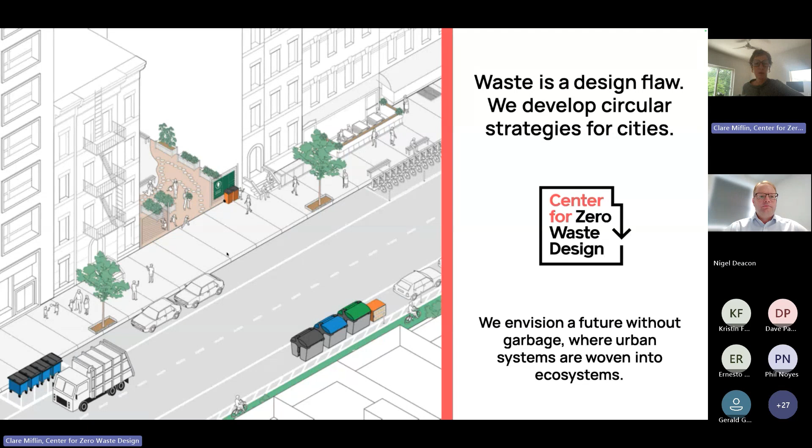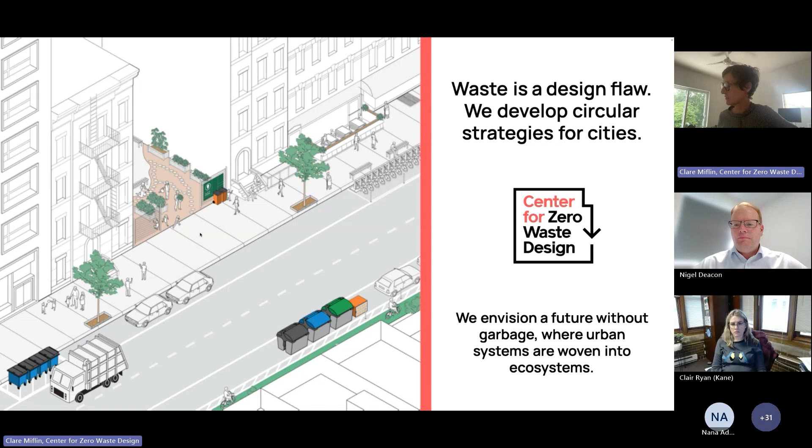Thanks, Nigel. Great to be here. So as background, I am an architect. I have this nonprofit Center for Zero Waste Design. We believe waste is a design flaw, and we develop circular strategies for buildings and for cities, integrating urban systems into ecosystems as far as we can.

I've structured this presentation in four parts: how we can move from linear to circular as an overview, and then looking at circular infrastructure, composting at the urban scale, and waste containerization. I'll be stopping at the end of each of those sections for questions, so put them in the chat and we'll stop at the end of each.

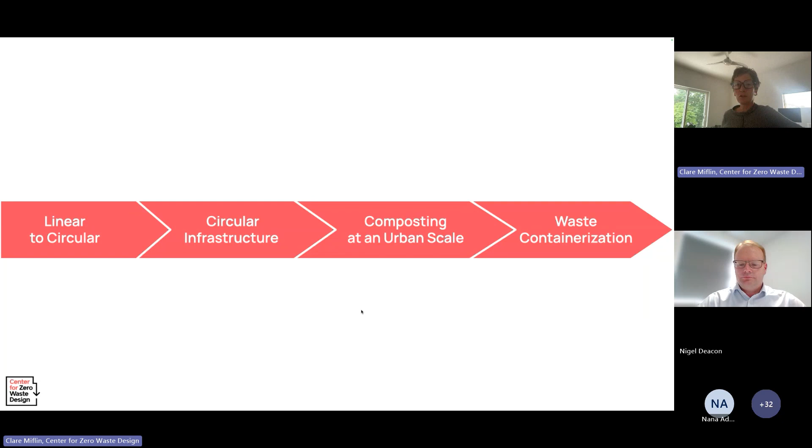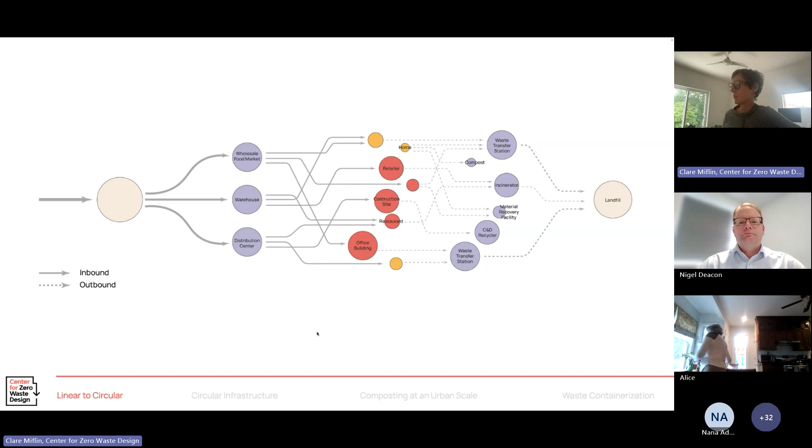So looking at linear to circular, our cities have all been developed for linear infrastructure. Goods or materials come into cities, any manufacturing typically happens all on the outskirts. It's delivered to these large wholesale facilities, and then it goes into the city proper. Similarly, there are manufacturing zones on the outskirts that take our waste, which then goes to landfill or incineration, apart from the small amount that is recycled.

So our cities are also zoned in that way. If we look at purple, that's the infrastructure zone I'm showing in the slide before, where things happen on the outskirts, and the yellow and red is the commercial and residential.

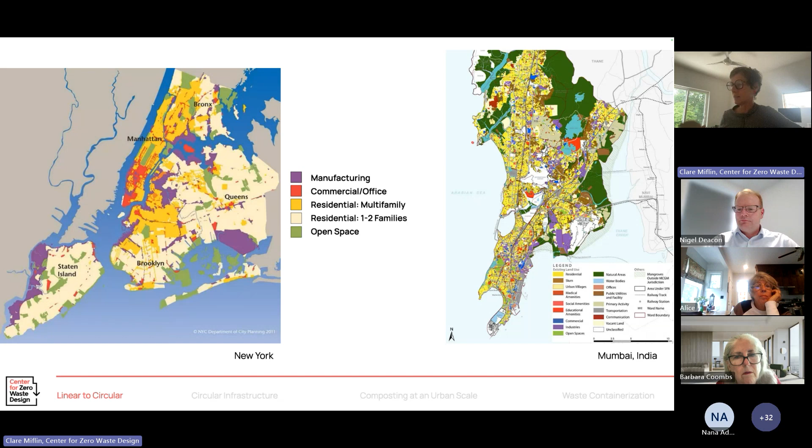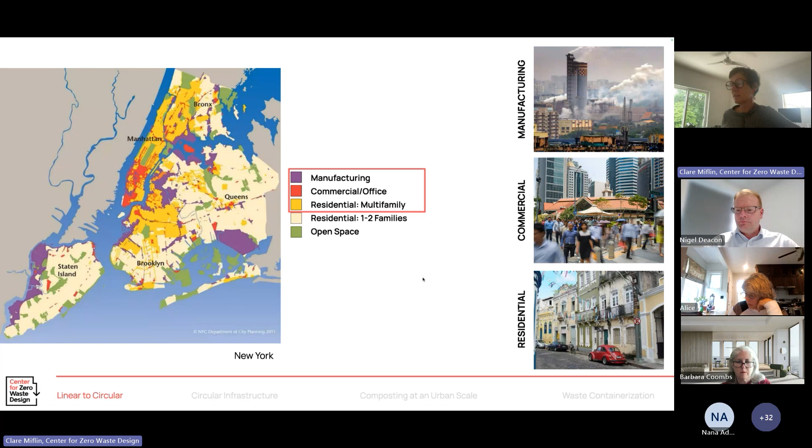So if we really want to change our cities to more circular, we have to look at land use. It makes sense why we've done this, because manufacturing is pretty noxious, and those large waste facilities are not the kind of thing you want integrated with commercial and residential areas. But in a fully circular city, there is no difference between goods in and waste out. It's just a movement of goods and materials that are reused many times, with smaller and more distributed facilities for repair, remanufacturing, or recycling needing to happen much closer to commercial and residential areas.

So we need more of a patchwork of uses distributed across the city, not just large manufacturing in the outskirts. And we've seen that the changing of zoning is kind of necessary.

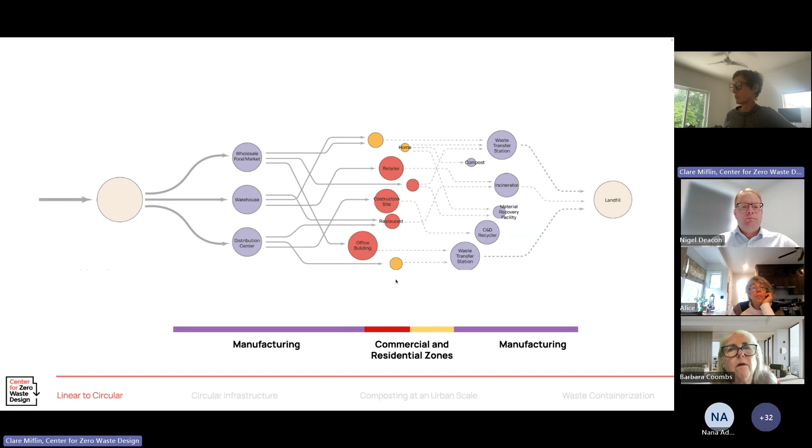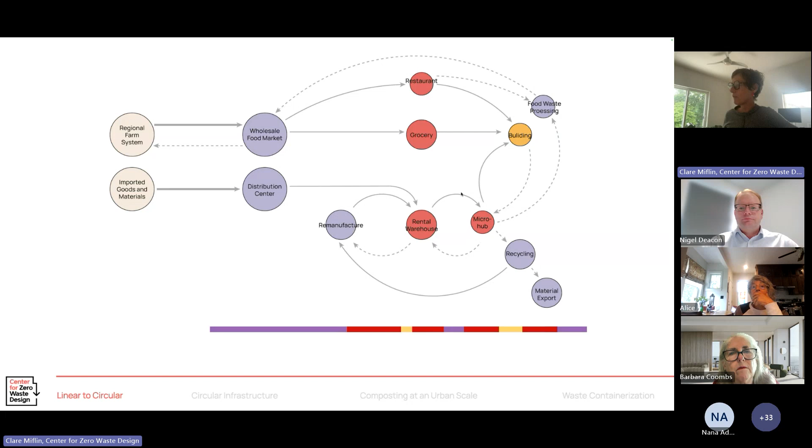And we've seen some movement towards changing that. For example, the NRDC, the nonprofit, developed model language for composting, which isn't currently in most zoning ordinances. They have this model municipal zoning ordinance for community composting.

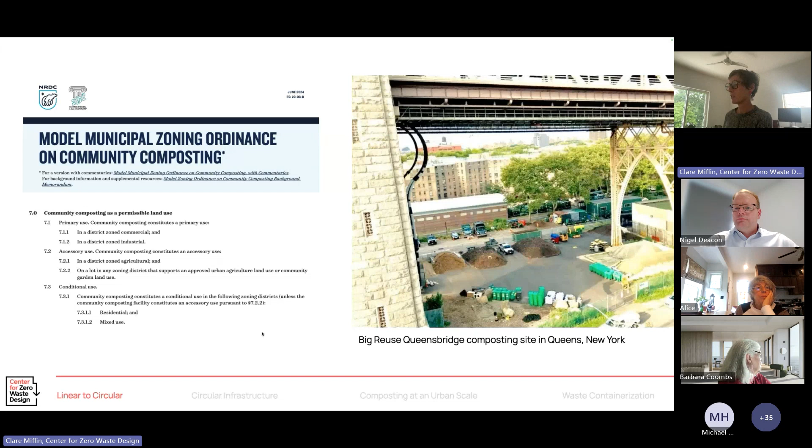But there are often these underutilized spaces in cities that can be used for composting, and the resulting compost is used in street trees and green spaces citywide. So that's just an example of how changing land use policies is kind of necessary as we move to more circular cities.

And approaching zero waste from the standpoint of circularity really involves minimizing consumption. As we see here, this is kind of a great, almost zero waste scenario where if you divert 90% of everything, you have a lot of materials going to recycling and to composting, and less to disposal.

But if we go to reuse, we can really reduce the amount of materials totally. If we can have everything recycled and reused, then the amount of materials going to disposal, recycling, composting, or biogas is much smaller. So we really like to approach with the waste hierarchy, minimizing consumption first.

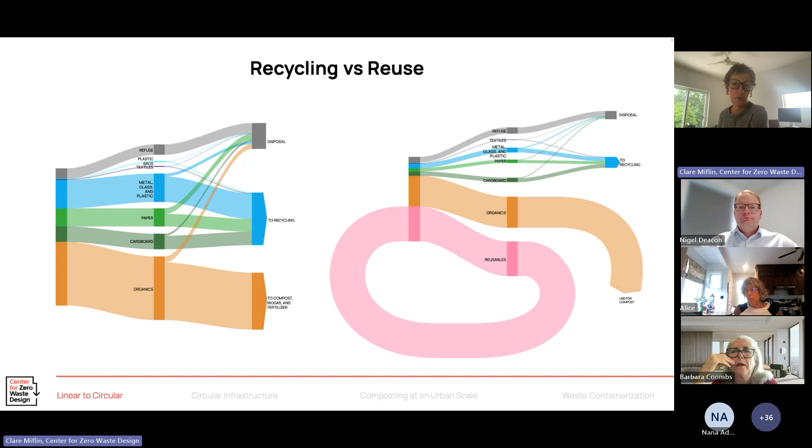Separation and recirculation of food scraps can be a great strategy to engage communities, supporting green infrastructure and reducing vermin, odors, and the negative impacts of trash, as we'll see later in the composting section.

Most of what I'm going to talk about today comes from this Put Waste to Work campaign we did for the incoming administration back in 2021. We looked at how to do a plan for a circular city, for any circular city, but we were applying it to New York City in particular.

We took a comprehensive look at the design strategies, and they focus on either designing infrastructure into the urban environment for reuse, regenerating soils with compost, and collecting waste in containers, not bags, because in New York City we have bag collection. I mean, we're moving towards containerization, but at the time we did this, it was all bags, pretty much.

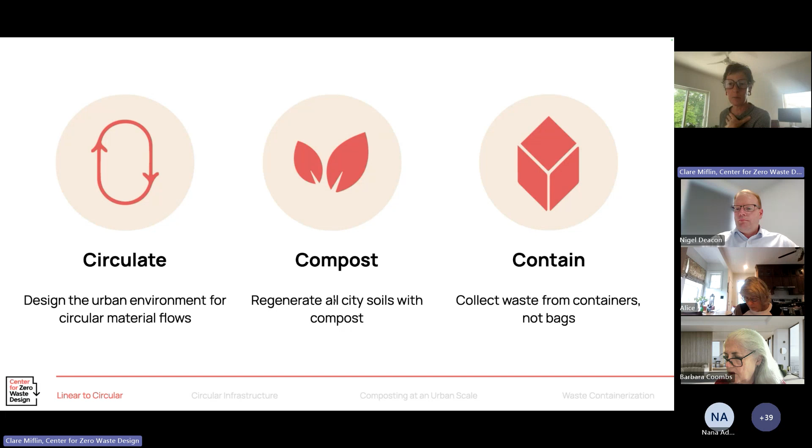So we're going to go through the three main categories and then focus on some examples for each. I'll move on to the circular infrastructure. That was mostly an overview in any case.

So we have these kind of high-level strategies like integrating delivery and waste infrastructure, such as last mile hubs and package rooms. It makes a lot of sense to co-locate delivery and take-back infrastructure as we go towards circularity. And that's whether it's at the scale of a building where your package room is alongside your waste room. It makes it much easier then to take back reusable packaging if they're co-located.

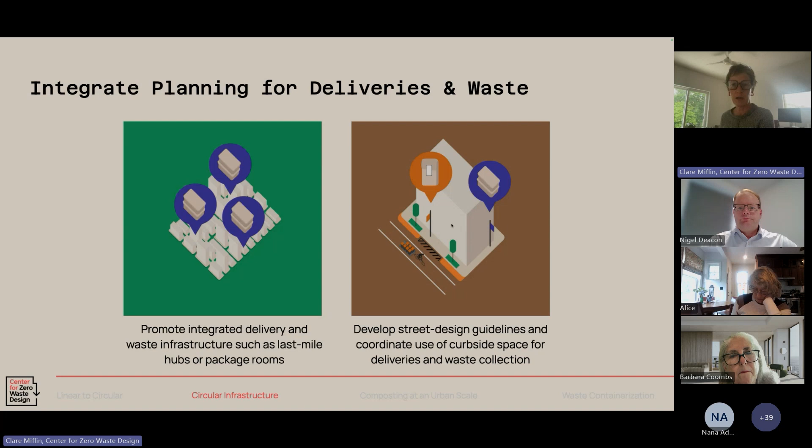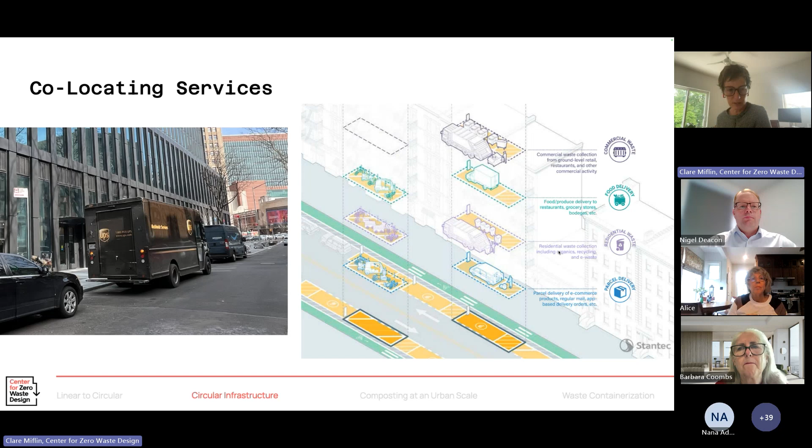Similarly, at the scale of the street, it makes a lot of sense too, that you can co-locate that curb space, and you can have curb space outside a building that could be used for deliveries or take back as well. Here we can see that kind of example. That same space could be used by the UPS truck at a certain time of day, but could be used for commercial waste collection or residential waste collection at other times of day. So really kind of thinking about the time and the strategy to make the best use of our curb space.

So we've also been working with the UK nonprofit Reloop on integrating infrastructure for deposit return systems for beverages. New York State currently has a bigger, better bottle bill, but very few of the containers... the bigger, better bottle bill would increase the deposit and increase the number of containers, the types of containers that would be accepted. And for that, we'd need much more infrastructure to take back, to be integrated into our dense urban environment. So we've been looking at how that is done now and how it could be increased.

And for those of you who know New York City, a lot of it is done in the informal sector and picked up by temporary mobile vans, and we're just looking at how we can integrate the informal sector and integrate more take back.

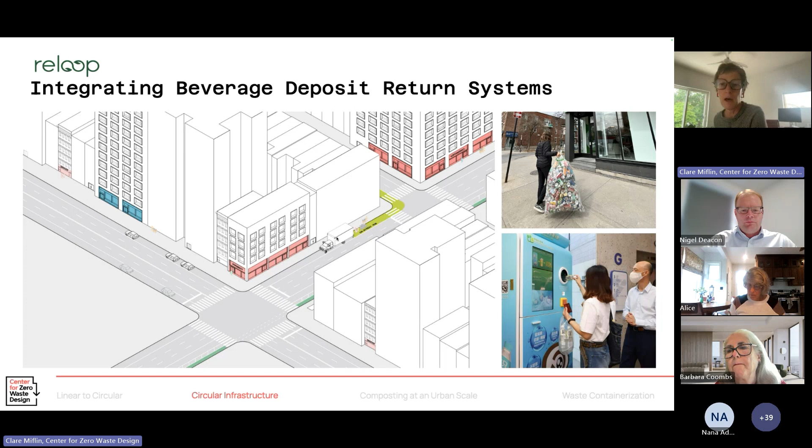We have to look at convenience, for example, in low density neighborhoods. It's probably going to be more about driving it in a car when you drive to the grocery store, which is kind of typical elsewhere in the country for bottle bills. But in a high density city in Manhattan, you need to be within like a 5-minute walk, we believe, of where you take back your bottles and cans.

And we have to put in infrastructure both for residents, for small retailers, for the informal sector, for the canners, and for building managers who may separate in their building. So we've kind of taken a look at how you can integrate that infrastructure into the city and how you can see if that infrastructure could also be converted to take back reusable containers in the future.

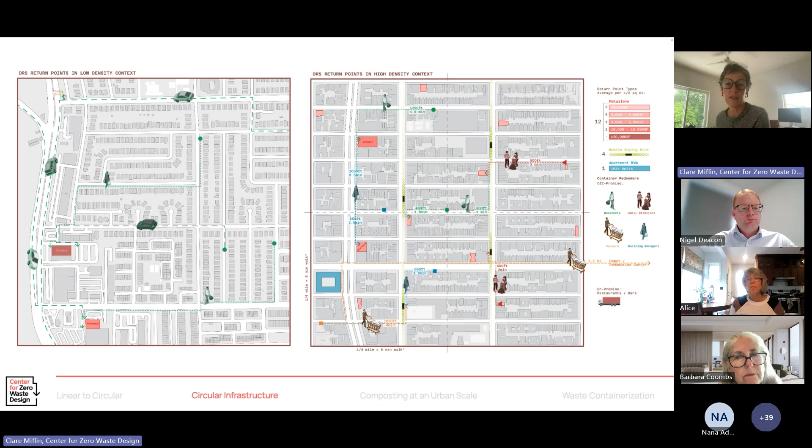And again, we've seen that it would make a lot of sense to co-locate it with micro hubs. There's a lot of these kind of on-street micro hubs, the street design DOT is working on to allow for this last mile delivery of goods. And whether that's on street or there's some under infrastructure, it makes a lot of sense to co-locate that with the take back of bottles and cans, for example.

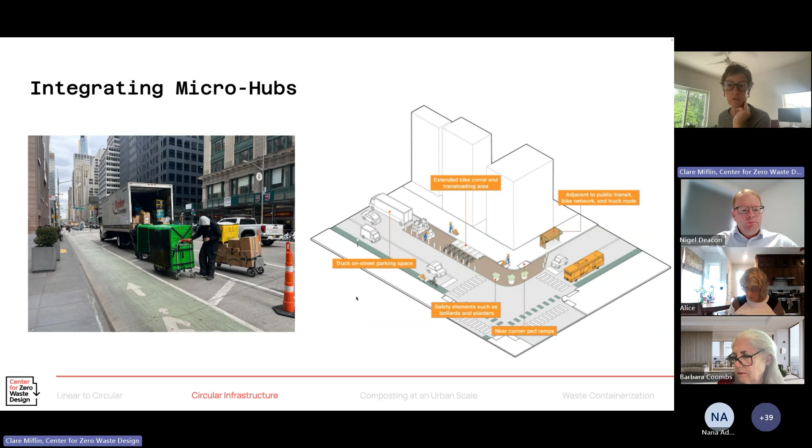Because the kind of delivery people have similar needs for facilities that could be co-located, such as public bathrooms as well, and also the truck access is a very similar use case. Then having facilities in your city for salvage, repair, and reuse. This is what I was saying before about reducing waste to start with.

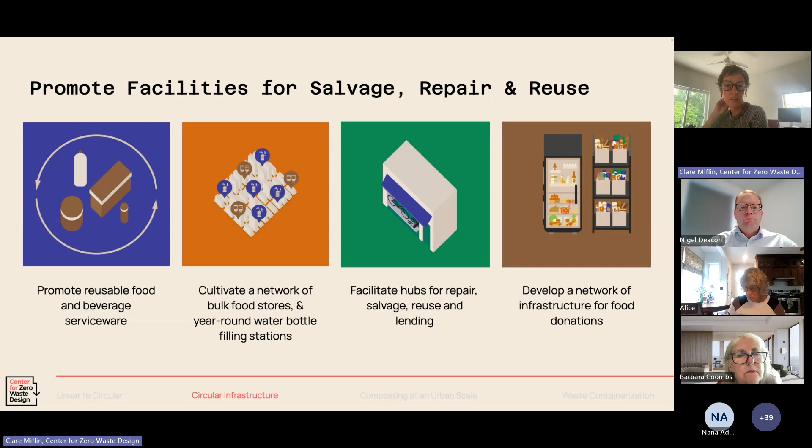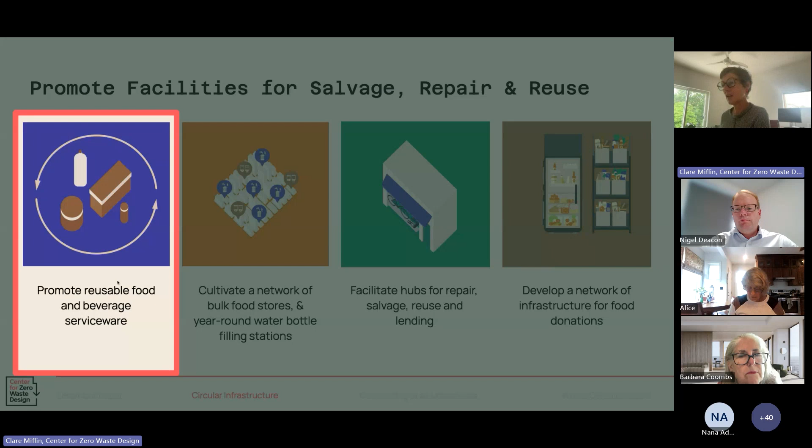So reusable food and beverage serviceware is one of the largest things, because that's a lot of the contents of our waste bins citywide. And we can see the impact of single-use disposable food and beverageware in our public space, overflowing like this, with vermin in the park that make the situation worse. And then it gets washed out in our storm drains to the ocean.

It takes a lot of money to collect these items and keep our cities clean. If we just put some money up front for reusable food and beverageware, there can be a lot of savings long term. Typically there needs to be money and investment from the city to set up these kinds of reusables, as well as policies to limit single-use packaging.

On the left here, we see in Singapore there was a policy that required reusables for dine-in at their hawker centers—they have a lot of food halls. There have been similar policies that require reuse for dine-in in Berkeley, California. But there do need to be washing facilities.

For example, France required reusables for all the fast food, but the pushback from McDonald's really weakened European policies that were set to have much higher requirements for reuse. Because they hadn't gotten the infrastructure in place first, there was a lot of pushback and it backfired.

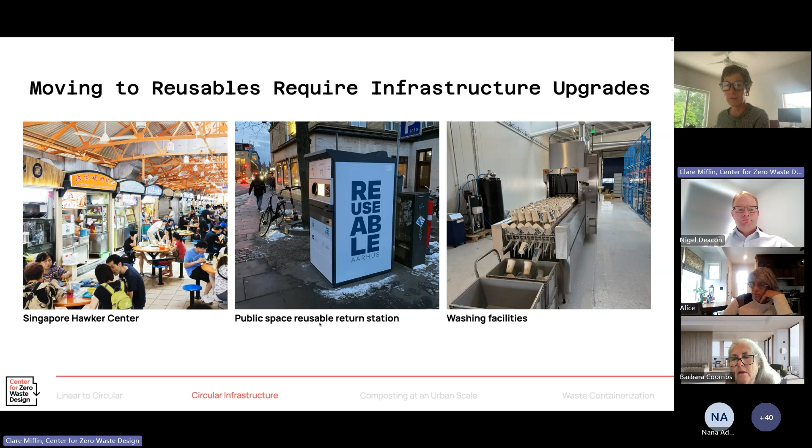I'm not going to go into these other strategies in detail, but other infrastructure really needs to be developed for circular material flows, like eco-industrial facilities where waste from one product becomes feedstock for another. We see these in some cities, just giving space for these companies that have circular processes.

Waste processing on underused land—the Queensboro Bridge composting was an example—but it could be anything like storing salvaged bricks or salvaged lumber that you don't want to truck far out of the city and back in. It's expensive for those kinds of companies to rent space in the center, so partnering with entities really helps.

And then zoned waste collection systems—we don't have that in New York City. We're just starting to do that for commercial waste, but they can incentivize infrastructure development, because if a hauler knows they have contracts for a certain amount of time and there's not so much competition in one zone, they can put in infrastructure both to increase diversion and to pre-process in some circumstances.

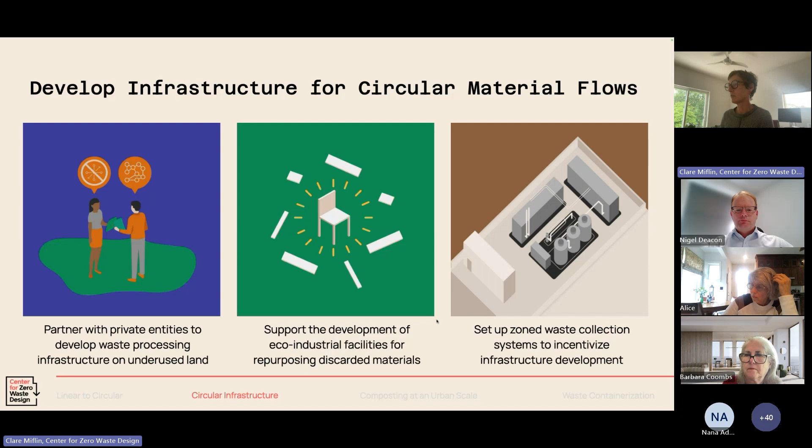And then policy can obviously incentivize waste reduction, whether that's a save-as-you-throw, pay-as-you-throw type system where you pay less for recyclable streams and pay more for trash, or nothing for the recyclable streams—this has been shown to reduce waste in many places. Obviously there's always a balance with access controls and how that works, but it was something New York City was going to study, and I believe should study.

And then just requiring management planning in new construction is something we've been working on for a long time as architects. It really needs to be designed into the building. And now in New York City, from our advocacy, all new residential buildings over 150 units do have to produce a waste management plan, which has to be reviewed by the city, which helps ensure there's enough space.

And then construction and demolition waste is obviously a huge issue too, and there's a lot that can be done policy-wide to support that. Actually, New York State just introduced a deconstruction model ordinance for municipalities in New York State, but there's a lot that could be done there too.

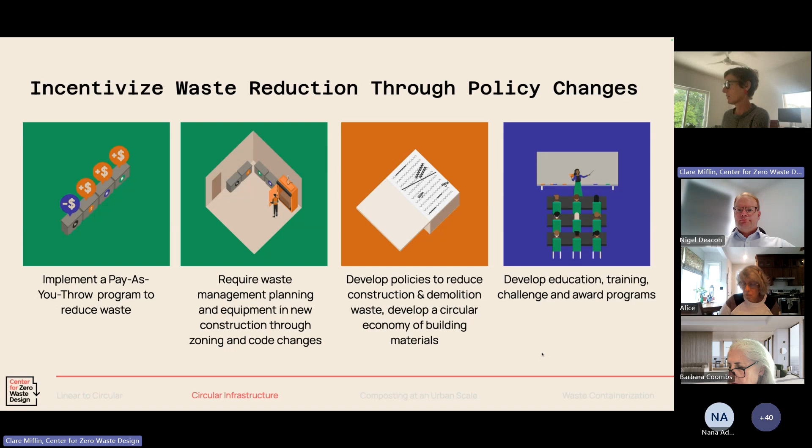One thing that underlies a lot of our strategies is this idea of equal convenience disposal. Cities like New York have been built with trash-only infrastructure, a trash chute that used to go to an incinerator in the building. Then they've added recycling, often in the basement, making it less convenient. Whenever recycling and food scrap drop-off are less convenient than trash drop-off, your diversion rate suffers. So whether it's in a building where we don't like desk bins, preferring a central waste station, wherever you get equal convenience disposal, you get higher diversion rates.

That's why we're advocating that New York City do all-stream containerization. Best practice is to have custom apertures for each stream, custom colors, and signage on the front, top, and back.

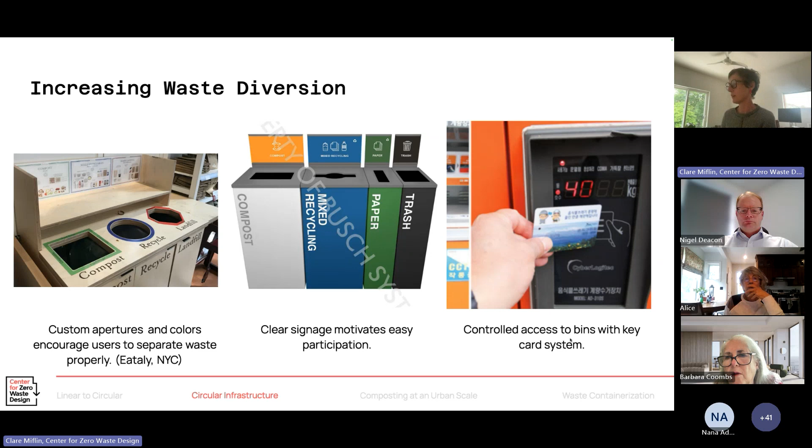That was the first section on circular infrastructure - let's see if there are any questions on that.

Thank you, Clare. We do have one question: where the plastic reusable cups are going through the large sterilization wash process, do you know if there have been any concerns about microplastic generation from that high temperature washing?

I actually don't know the answer to that question, but I think there may be concerns. I'm trying to think about the material of the cups, whether it's a material that generates microplastics - I'm not sure. I know they looked into the material for the cups closely, but I don't know. If I find out, I'll send that to you and maybe you can share it out.

Thank you so much - really interesting question. We're looking at some reusable systems for work we're doing here in New York City. There are stainless steel cups, which are an option, but it's always a balance of cost versus materials. They can also get water marking on them so they don't look as clean - it's always a balance. Most reusable cup systems worldwide do use some form of plastic, like polypropylene. I'm sure there have been investigations into microplastics, but I'd advise looking at Upstream - that nonprofit has a lot of good information about reuse.

Excellent, thank you. Now I'll move on to composting at an urban scale.

We really believe in distributed small-scale composting throughout the city. We realize that in a dense city like New York, we probably don't have use for all the compost that could be made within the city, but we believe all soils should be regenerated with compost, because healthy soils are a big part of healthy green spaces and healthy urban trees. And engaging communities to reduce and separate waste is also huge.

We believe there should be guidelines for on-site composting that parks and green space users can use. It should be incentivized, the city should support it, and there should be educational or volunteer opportunities. We really like composting food and horticultural waste together - if composting happens in parks, having food scraps as well helps break down weed seeds because it creates higher temperatures, and it can help engage volunteers.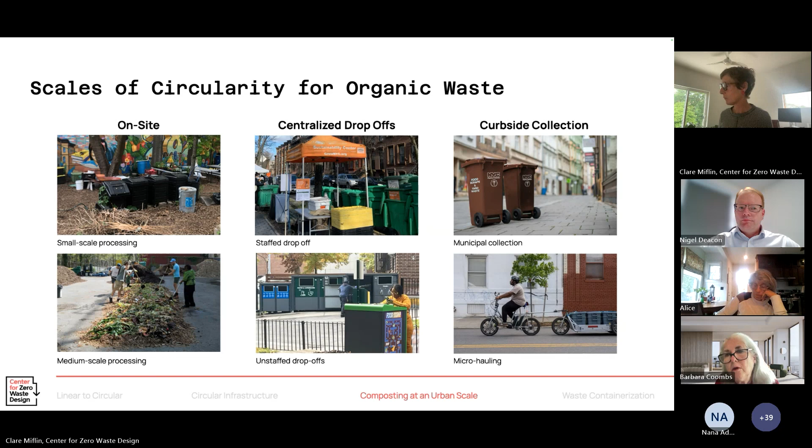But we do really believe in microhauling and making compost locally as well. So we like to say that community compost makes good soil, both literally and figuratively. The world's soils are degrading at a huge rate, so making soil better really can make a healthier city.

New York City has goals to expand the tree canopy, increase stormwater detention and infiltration, reduce carbon emissions, and grow the green workforce, and composting can play a role in all of those. As cities integrate nature-based solutions, composting is a really valuable tool to engage people in waste reduction and green space stewardship.

So we really think it should be incentivized for street trees and green space maintenance. For example, in your green infrastructure maintenance guidelines, it can be there, and it can be part of codes. In Washington State, they have this Soils for Salmon initiative, which requires the use of compost in many new development or redevelopment processes. So if you're going to have an impervious surface, you have to apply compost alongside.

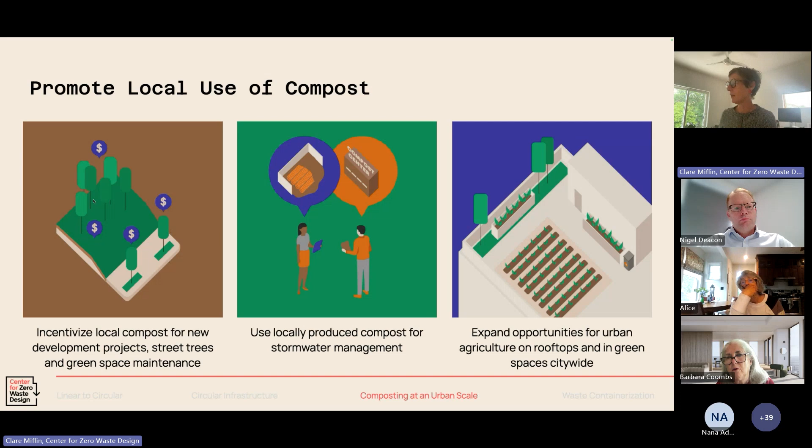And that's really for its value in filtering out pollutants, so the water is cleaner in the waterways for the salmon in that ecosystem. I learned about this at the ASLA conference - Circular Philadelphia is actually doing these trials where they're making soil from local compost and sand made from recycled glass. So a really circular solution where you're making soil from waste materials in the city.

And in Seoul, there are a lot of rooftop gardens that use compost or fertilizer from the food scraps. And there's also, as well as all the benefits I've said already, a lot of health benefits - like just playing in healthier, compost-rich soils has been shown to increase the immune system of people within 28 days. It was a Finnish study.

Kids just playing in healthy soil increases their immune system in 28 days. Community gardens also encourage healthier diets - vegetables grown in compost-rich soil are much higher in minerals and more healthy. And there's social resilience and mental health benefits as well.

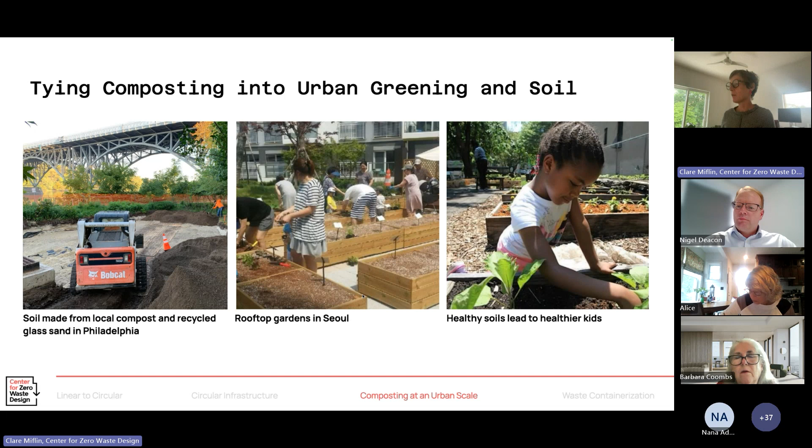So we really believe in increasing the amount of community scale composting in cities. And then it can be used for stormwater infrastructure. New York City has spent billions on rain gardens, and compost can hold 6 times its weight in water, so it can ensure rainwater infiltrates faster and better. Rain gardens typically have engineered soil because you can really determine the infiltration rate, and compost breaks down, so if you do use it, you have to apply over time.

But in green spaces like this, where the grass is often heavily compacted and the water is not infiltrating, as we see here in this heavy rain - if all this park had been top dressed with compost in combination with trees and shrubs at the low points to allow the water to infiltrate deeply, we wouldn't have this flooding.

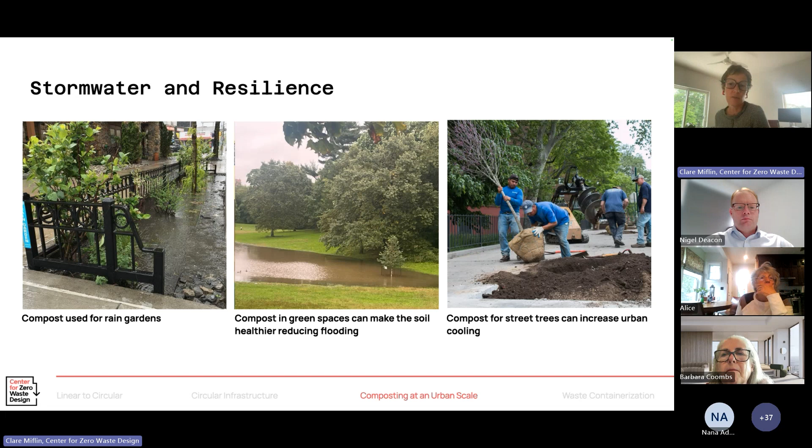And for street trees, if you add compost regularly, it holds more rainwater and then increases the cooling effect and reduces the likelihood of drought damage to the trees. So that's my thoughts on how to integrate composting into cities, and I'll stop there for any questions.

Well, thank you, Clare. We've got a couple of interesting questions from Barbara, one of which is probably from the earlier section, but that's fine, no problem at all. I'll do my best to pose this, and I hope I've understood it correctly - and Barbara, you're welcome to come in if you wish. But where cities are changing their collection process and large trash containers are becoming surplus to requirements, are you aware of plans where they've been reused for recycling? Has a recycling partnership been involved with this? Can they be used at apartment buildings, that sort of thing? Have you come across anything like that, Clare?

No, I haven't, but I like the idea. I mean, generally, as we divert more recycling and more food scraps, having a smaller trash bin is necessary, and that's what pay-as-you-throw incentivizes. But actually reusing these perfectly good bins for a larger building, I don't know of any city who has done that, but I think it's a great idea. Using it for a different stream like recycling is tough because often they're color coded, so it would be the wrong color, but for a larger building it makes a lot of sense.

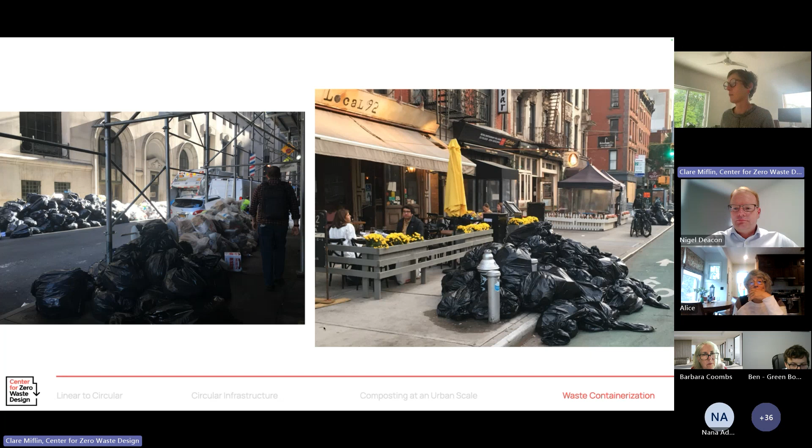It's pretty obvious why we care about waste containerization in New York City because of the density and the impacts to public space - it just needs to happen. Ever since we did the zero waste design guidelines, we pushed for waste containerization as a way of helping to get to our zero waste goals. So that's why we're upset that New York City is currently pursuing containerization for trash only, which will just get us further away from our goals.

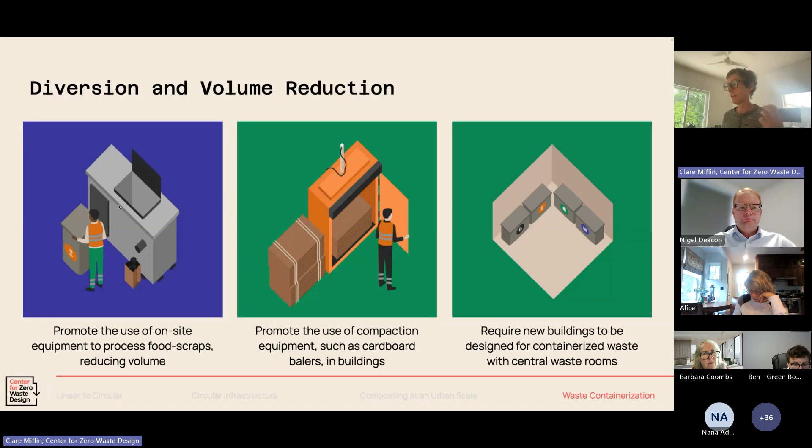Instead, we need containerization that helps get us to our goals. So there's ideas of how to include increased diversion and volume reduction through having a central waste room or having compaction equipment, or on-site equipment to process food scraps. All this can help reduce the volume of material that has to be containerized, which is a good thing. And this is the waste management planning for a building that we've been talking about for a long time - how should an architect design that into buildings?

You have to plan the whole process. How is stuff separated? How is stuff moved? Do they move one stream at a time in one dolly, or do they have to have bags so they can put multiple streams in one dolly? That has to be worked out.

There needs to be enough storage space for each waste stream, or whatever is separated will not stay separated. Markings on the floor can ensure the tilt trucks go back in the right space. And then considering how the waste is picked up - we really feel like this has to be really thought through. That underlying principle of equal convenience disposal has to be followed.

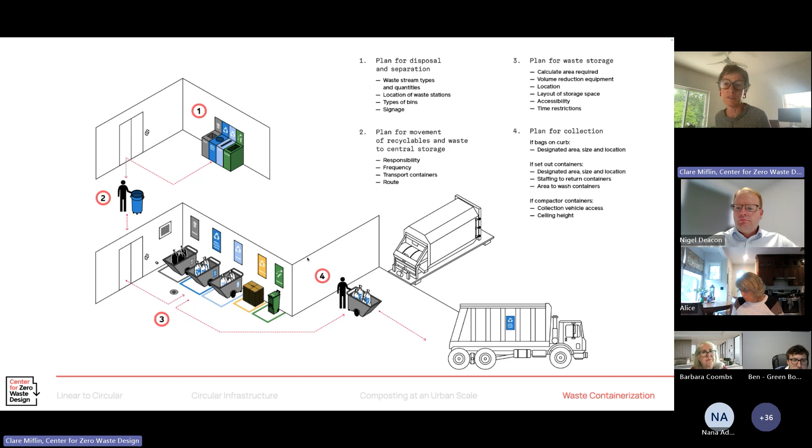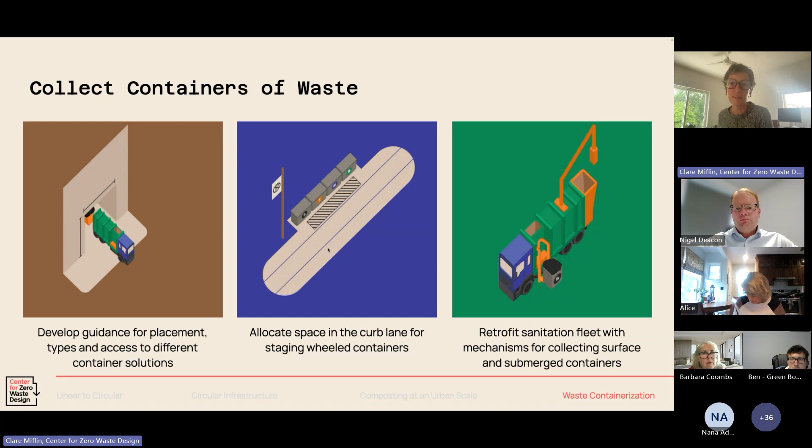Next, collecting containers of waste rather than bags - there has to be guidance about where they're placed. There has to be space in the curb lane. You have to retrofit trucks often. So it's a difficult thing to figure out, and for our higher density cities, it's a real spatial issue.

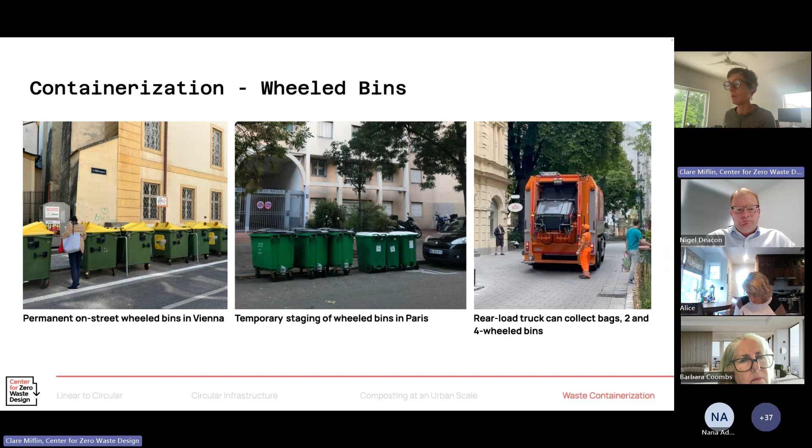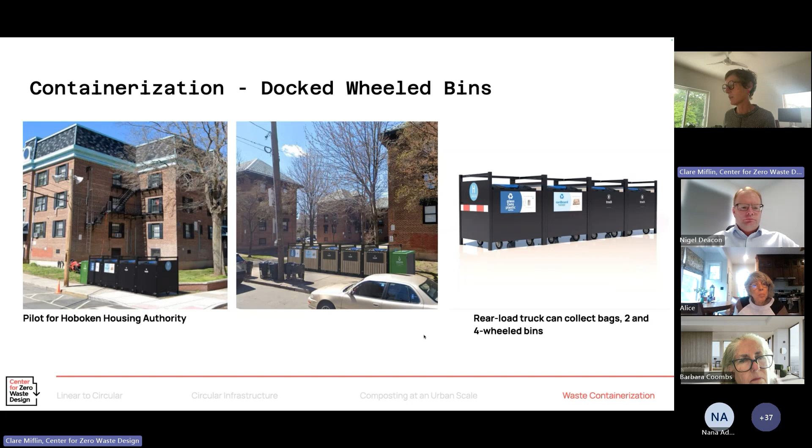And we're looking at piloting that in Hoboken, where previously residents were putting their waste in trash cans. So if it goes to these docked containers, we'll be greatly increasing the diversion rates.

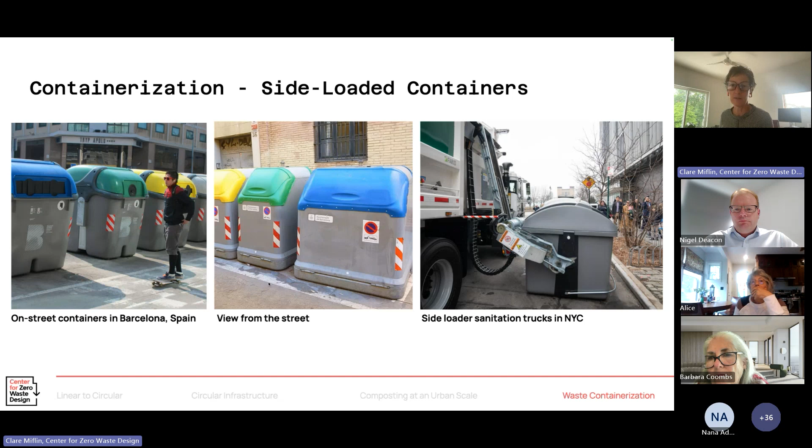They don't require a left or right hand truck like the side loaders do. So there's so many things to think about, how to tie it into urban form and how they're used by residents, or New York City's only allowing building supers to use them, and they're going to be access control. Lots of things to think about when you want to containerize a city.

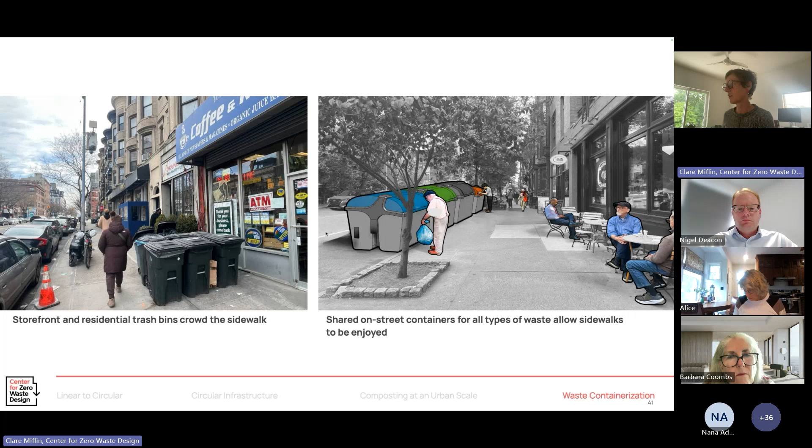But one thing we're looking at is the way waste has been containerized in lower density neighborhoods. So in New York City, they've required under 9-unit buildings to use 2-wheel bins, and on streets where you have storefronts at the front, there's just no space for these bins inside, so they're crowding our sidewalks. So we're really advocating to have shared containers, whether they're wheel bins or side load, in the street to free up the sidewalk so it's not filled with bins like this.

Here you see, the city solution is really requiring bins just for trash and organics, and just a 6-unit building with a storefront would require so many bins that it takes up the whole storefront. So it really is not good for public space. Whereas our proposal would allow the residents to come straight down with their waste and put it in shared containers for all waste streams at any time of day.

We're also looking for large buildings. The city is suggesting that the bags from the trash chute are brought up and put into these permanent bins in the street. Whereas we think for large buildings, it makes much more sense to have the trash chutes connected to a 4-wheel bin, which is staged temporarily, and to also collect recycling from 4-wheeled bins and stage them on different days, collect them on different days.

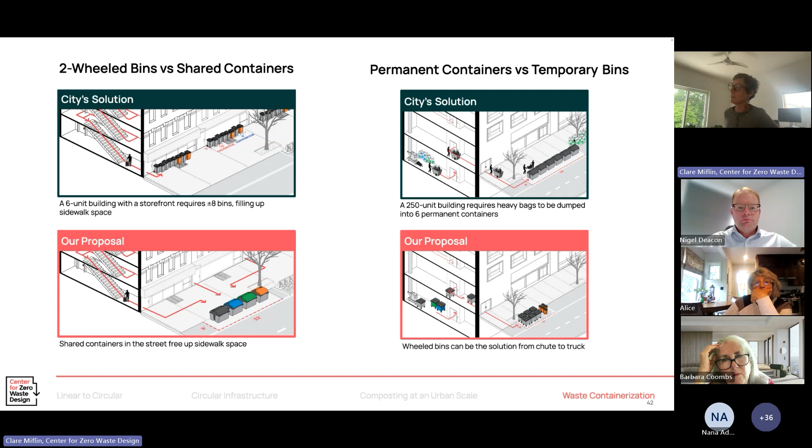So it's equally convenient for all streams, whereas in the city solution, the porters can take out trash any time, but they will need to save their recycling and set it out in bags once a week, which is less convenient for them. And that will affect diversion rates.

Collection schedules is another thing that needs to be adjusted. Here in New York City, there's neighborhoods that have one families that get 3 times a week collection of trash, the same frequency that the financial district with its residential towers gets. So really modifying collection schedules for density, and also, having 3 times a week, 1 time a week food scraps and recycling is not incentivizing the behavior you want. We should be increasing collection for food scraps and decreasing it for trash.

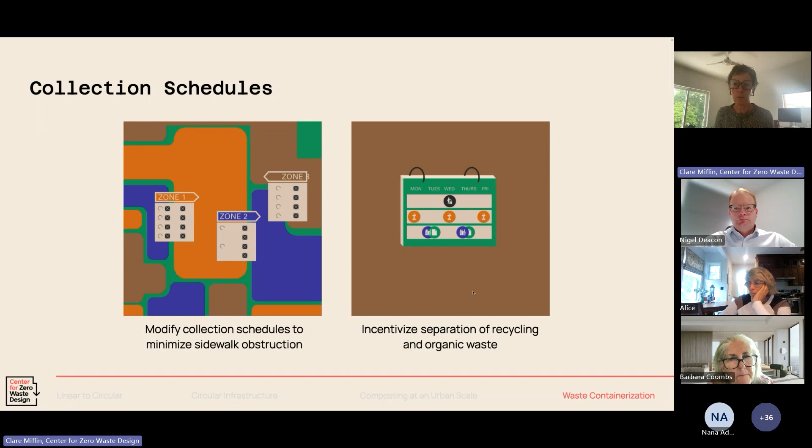And then having drop-off sites for other waste streams is important as well. So yes, this is showing how less trash, more of your recyclable streams makes sense to incentivize the right behavior. We do waste management plans the whole time, and we have to show buildings, well, if you do a good job, you need more space for your storage. If you do a bad job, you need less, and that's just incentivizing the wrong thing.

And then looking at how you integrate them into streetscapes is important. Below grade waste containers can reduce space, but of course it's more expensive. Shared waste facilities makes a lot of sense. We've seen that happen in Battery Park City, where multiple buildings bring waste to one roll-off. We've seen it happen in Roanoke, where they have a shared waste drop-off for the downtown because they don't want bins in the public space.

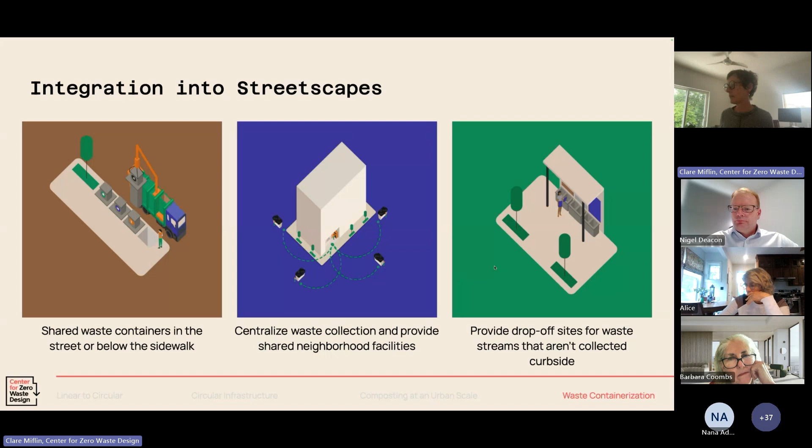And ultimately, it's like, what do we want our city to look like? Do we want it to be this linear city full of empty buildings, full of unused things, these storage facilities, fulfillment centers, our public space full of deliveries and trash? Or do we want a city with libraries, engaged communities, green stewardship, fixing, repair, where people really have tangible ways of helping make the city more circular and help weaving these urban systems into ecosystems, and we get rid of the trucks on our streets? We think of more low impact vehicles. I mean, the difference is just huge.

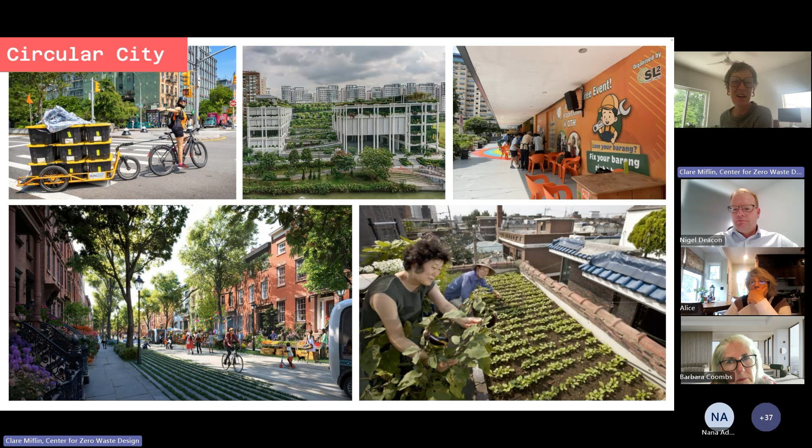So that's what motivates me. And I hope that is compelling to you all too. Excellent. Thank you, Clare. So one question we've got is

Whether you've got any thoughts around an engagement strategy for construction and demolition waste and recycling? An engagement strategy. I mean, I think there's so many things to move towards circularity of construction and demolition materials. I mentioned earlier, there's many policies like this deconstruction ordinance that New York State just put out that requires municipalities, if they want to get grants, to put in some kind of space that these materials can be stored in, or an auction where they open up the building before deconstruction and allow companies to come in and bid on the materials in the building.

There's so many ways - Portland did the requiring deconstruction for older buildings, and then they brought it progressively forward. I think other cities have done, like, where you get incentives with demolition permits, kind of a bond program. There can also be things for certain streams, like ceiling tile or carpet, that are easily divertible if, in New York City for example, we have manufacturers that will take that back. So putting that into building code and regulations is something else.